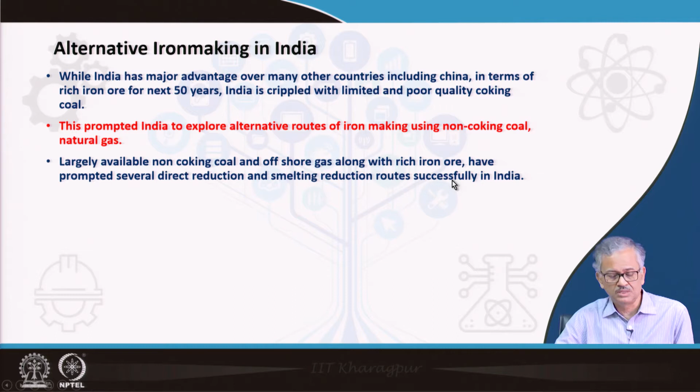This prompted India to explore alternative routes of iron making using non-coking coal and natural gas. We have rather limited natural gas resources, so we have to depend more on non-coking coal. Largely available non-coking coal and offshore gas, along with rich ore, has prompted several direct reduction and smelting reduction routes successfully in India. You can see that several units have come up.

Most importantly, this has helped disperse Indian steel production from eastern India. Initially, all the steel plants were developed in eastern India, because eastern India's Chotanagpur plateau is very rich in iron ore, coking coal, and limestone - everything is there. That's why all the previous SAIL steel plants grew there. Even TISCO, a private party, the Tata Iron and Steel Company, is also in Jharkhand, in the eastern region, because they could easily mine iron ore, coal, and limestone.

But today these plants are slowly dispersing from eastern India, because we are no longer dependent only on that region - we can use natural gas, which is available offshore near the western part of India. So steel plants are also moving, because they are producing DRI using natural gas, and moving away from eastern India, not depending only on rich iron ore which is available in other places too. This is the alternative route - making iron using non-coking coal as well as gas-based processes. It is better for steel plants to be uniformly distributed over India rather than segregated in one place, as happened initially due to proximity of both coking coal and iron ore.

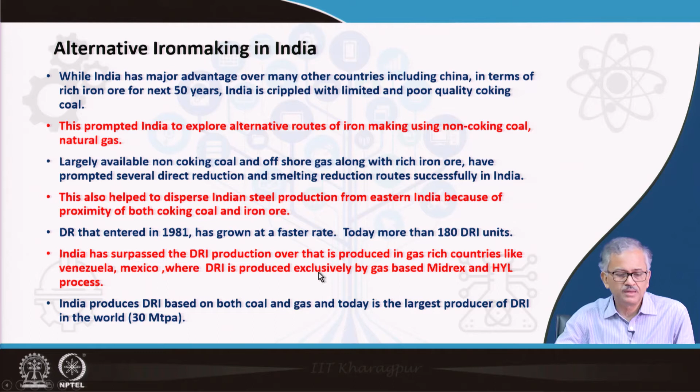JSW also has, in Dolvi, DRI plants that are Midrex based. That DRI plant uses coke oven gas as well as natural gas, mixed together, because natural gas availability is less while coke oven gas contains lots of hydrogen. So the Dolvi plant operates with a 2:1 ratio of coke oven gas to natural gas.

Domestic DRI capacity increased by around 280% in 8 years, from 2005 to 2013, so DRI capacity increased significantly, around 3 times, from 2005 to 13.

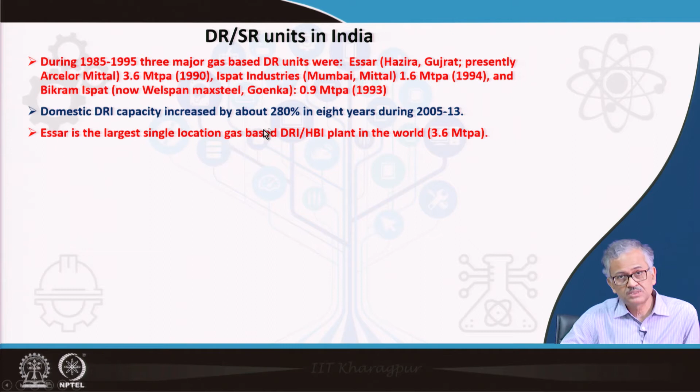Similarly, JSPL is the single largest location of coal-based DRI plant in the world, with 1.32 million ton coal-based DRI and 2 million ton syngas-based DRI. In Raigarh, Raipur, they have a 1.32 million ton coal-based rotary kiln furnace DRI production unit. They also have a 2 million ton DRI unit that is coal-based syngas and Midrex - they retrofitted the Midrex with coal-based syngas at their Angul plant in Odisha, producing around 2 million tons of DRI. Combining these two, JSPL is the largest single location for coal-based DRI in the world.

After 1994, no natural gas-based DRI HBI plant has been set up; the stress is now mostly on coal-based production, because coal is plentiful. Major growth in the coal-based sector occurred from 2003 to 2004 and 2008 to 2009.

Presently there are no small coal-based plants, because coal-based DRI rotary kiln furnaces pollute the atmosphere significantly and don't follow environmental norms. That's why small scale coal-based plants are not allowed by the state government - the pollution control board doesn't allow it. Initially, the Raniganj area in West Bengal saw a lot of these small DRI plants, coal-based rotary kiln furnace plants, mushrooming without looking after the environment, which is not sustainable. Now it's under state government scrutiny, and small scale coal-based plants of 50 tons or 100 tons per day are not allowed.

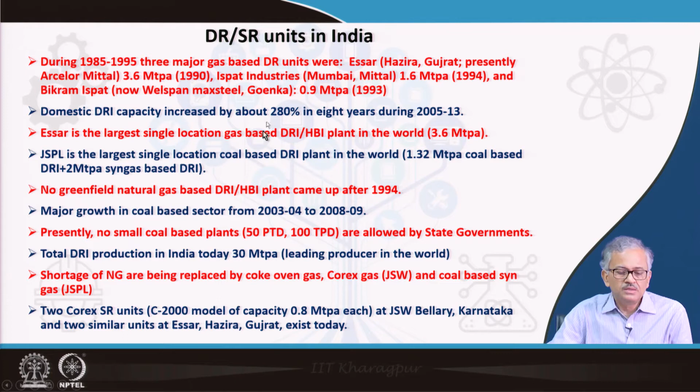So this is the status of DRI plants in India, and India has great potential to develop further in this area. So far in India, technology does not exist that can use iron-bearing waste. There is a bright future for some technology that can utilize this iron-bearing waste material, and RHF can be one very good technology, because in the RHF you can convert it to sponge and then melt it. Another technology may be smelting reduction - there is a Hismelt process type of process which has a very bright future in India.

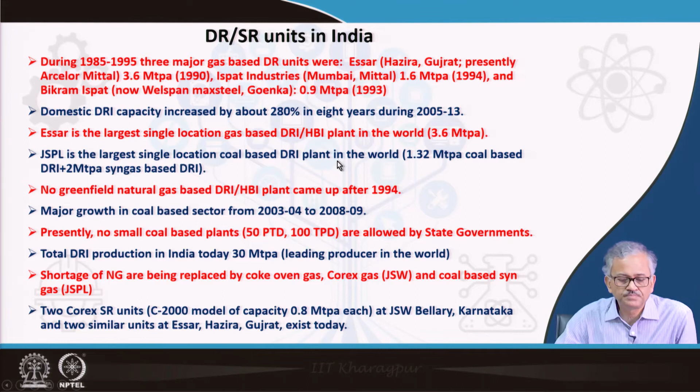Now some comparative data of the Indian iron and steel sector versus global benchmark. If you see productivity-wise, blast furnace productivity measured in tons per day per meter cube, India is 1.5 to 2.5 compared to a global benchmark of 2.5 to 3.5. So Indian production is quite low; we can improve it. Also, sometimes we run under production - whatever the capacity, we cannot produce that much because of lack of demand or other issues involved in the plants. So most of the time our plants run under capacity. That is another major problem, and productivity is quite low compared to the global benchmark.

Energy consumption in gigacalorie per ton of crude steel: India is 6 to 6.5 compared to the global benchmark of 4.5 to 5.5. In terms of gigajoule per ton of crude steel, India is around 28, compared to much less, around 22 gigajoule per ton of hot metal globally. Coke rate in kg per ton of hot metal in India is around 350 to 500 kg of coke per ton of hot metal, and the global benchmark is 300 to 350.

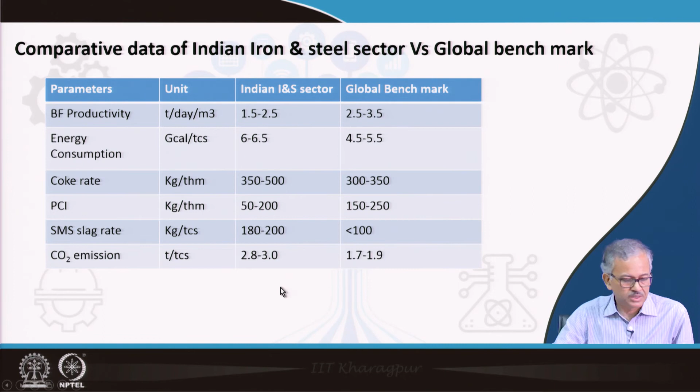Now I will talk about education and research in India, because India needs cutting-edge indigenous and energy-efficient technology. For that, I think research and education in India has to be revamped for day-to-day innovation and futuristic innovation of technologies. But even as we are gearing for 200 million tons of steel in the near future, steel education and research has taken a backseat.

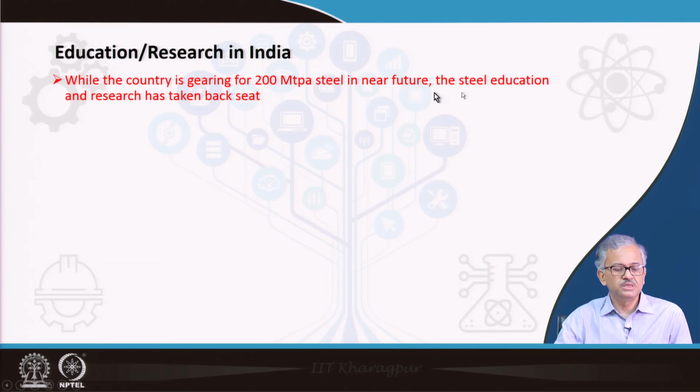This is very unfortunate. There was a decline in the steel market in 1990, and the migration of graduating engineers to the IT sector and management jobs has inflicted irreversible damage, resulting in an acute shortage of qualified engineers in plants and the R&D sector. Most graduating engineers shifted to IT sector and management jobs, not only in metallurgy but in all departments.

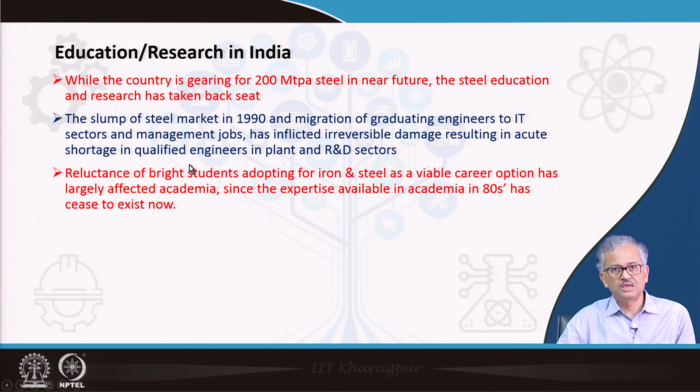Reluctance of bright students adopting iron and steel as a viable career option has largely affected academia. Today we do not have the gamut of academicians that used to exist in the 1980s, because bright students are not adopting iron and steel, both for industry and for academics. Possibly the job is not very lucrative, not a white collar job, money is not much, or development scope is not much. Whatever it may be, there is huge reluctance in adopting an iron and steel career.

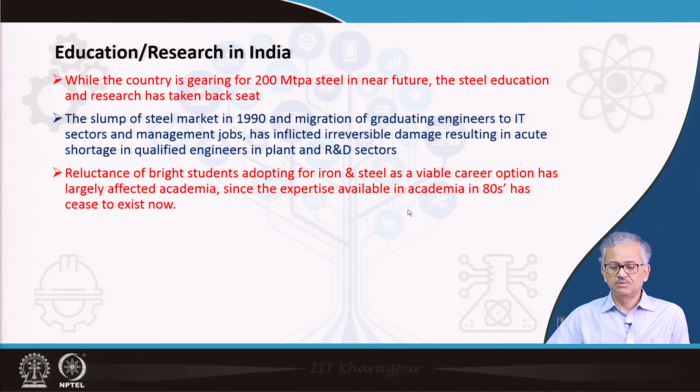As a result, academia is also suffering. Academia is not getting good students for research and education, research and development. As a result, faculty is also shrinking significantly, because no good students means no good faculty in the future. This has significantly decreased and subsequently affected postgraduate teaching and research programs in many departments, and it has formed a vicious circle of lower and lower iron and steel research in India, because no bright students, no faculty, no bright students. As a result, research in the area of iron and steel is shrinking day by day.

Some initiatives have been taken by the Ministry of Steel, like introducing steel chair professors, and also giving some incentives to third year and fourth year students, some scholarships, such that they adopt a career in iron and steel, but it doesn't look to be very effective.

But the country seems to lack critical manpower today, because iron and steel research is very limited in India. We can hand count the people who are doing iron and steel research. When I visited international conferences in Japan and China, you could find so many people working in different areas of iron and steel. I have seen some 50 researchers in coal making, coke making, coke beneficiation. But in India, you can hand count the people doing iron and steel research today. So we are very much lacking.

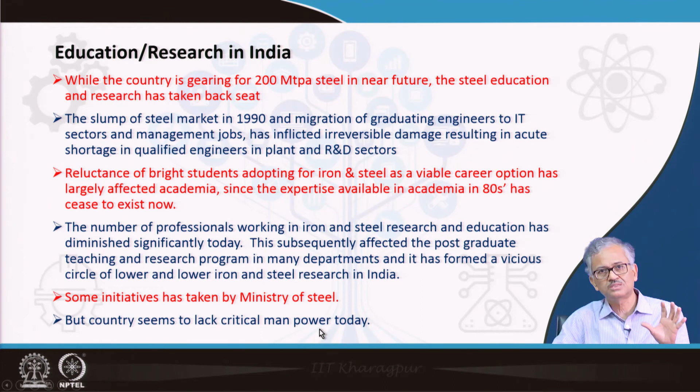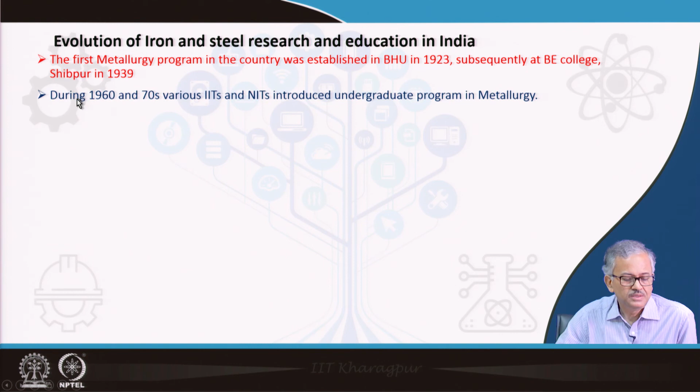If we see how the metallurgy program evolved with time, the first metallurgy program in the country was established at Banaras Hindu University in 1923, and subsequently at BE College, Shibpur in West Bengal, in 1939. During 1960 and 70, various IITs and NITs introduced undergraduate programs in metallurgy. However, between 1970 and 2010, only 6 other colleges added metallurgy. So you can understand there is a declining interest in metallurgy.

The first PhD from BHU was in 1955, and regular PhDs started from 1960 from other departments of other institutes.

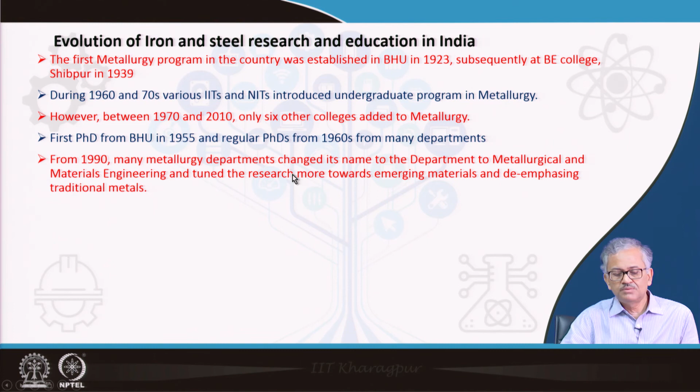From 1990, many metallurgy departments changed their name to Department of Metallurgical and Materials Engineering. The materials attachment has become more, and this tuned research more towards emerging materials, de-emphasizing traditional materials like iron.

Traditional subjects like extractive metallurgy, fuel and mineral engineering are cut short to make places for courses related to materials like electronic materials, nanomaterials, biomaterials, which are given more weightage. As a result, new engineering graduates remain underexposed to metal processing and allied subjects. They remain really underexposed, so how will the interest grow?

Several industrial R&D centers have also been established, but innovative and path-breaking technology is yet to emerge. Where will this technology come from? That requires good manpower, a good research team, combining industry R&D and academia. That should be a good team, not just a couple of people. There should be a large number of people working together, such that we can have some innovative and path-breaking technology.

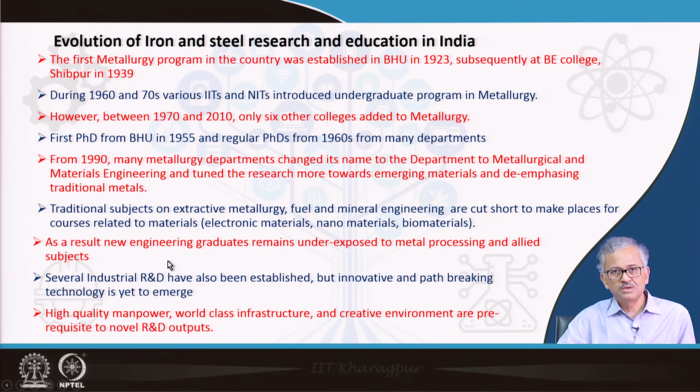So what is required is high quality manpower. That is very much required, and unless students are interested, you cannot do that. So we have to bring back the students to the curriculum, and we have to open up more courses on extractive metallurgy, such that students get exposed and grow interest, leading to high quality manpower development. The steel plants also have a role to play, such that they can make a very good place for bright students to stay there.

So, high quality manpower and world class infrastructure. There is infrastructure we are also lacking, especially in iron and steel research, since the number of faculty and funding is very limited. We do not have world class infrastructure. A creative environment and bright minds are prerequisites for novel R&D outputs.

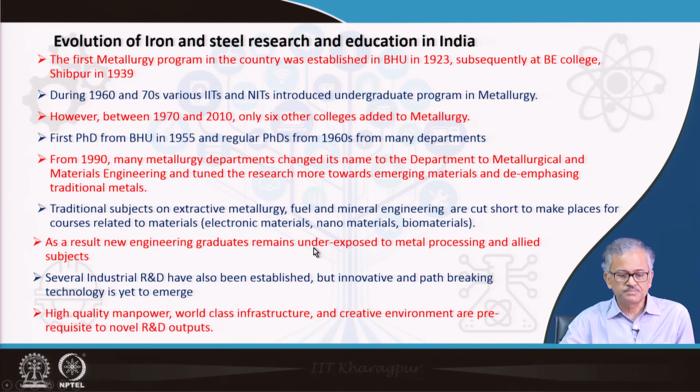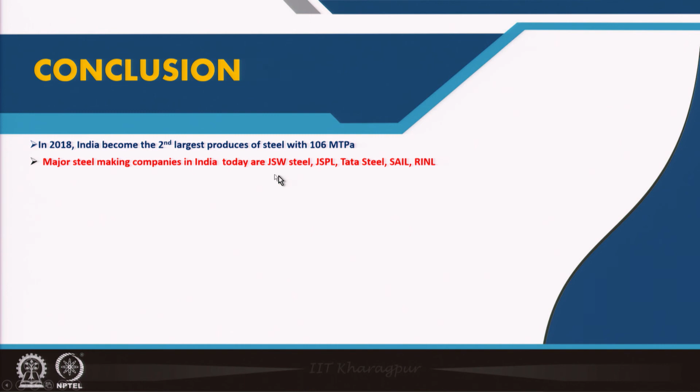So with this, I will come to the conclusion of this section. In 2018, India became the second largest producer of steel with 106 million tons per annum. Major steel making companies in India today are JSW Steel, JSPL, Tata Steel, SAIL and RINL. A large domestic market and availability of rich iron ore for the next 50 years indicate a bright future for India in steel making.

We have bottlenecks also. The bottleneck is coal. We do not have good coking coal, so since we cannot overnight change to other alternative technologies, we have to run with the BF-BOF process to expand iron and steel production, and we have to import coking coal from abroad. But we can increase the number of ports such that we can tap sources from other parts of the world also.

Also, some bottlenecks are there with respect to labor productivity, management and infrastructure, and all this we have to look into and improve. India today has diverted attention towards this.

It is very likely, and a good step, to move towards alternative routes of iron making, also utilizing non-coking coal and whatever gas is available, or based on syngas we have to produce synthetic gas, or you can utilize process gas to produce DRI. Whatever way, we have to go for alternative routes of iron making parallel with the BF-BOF process.

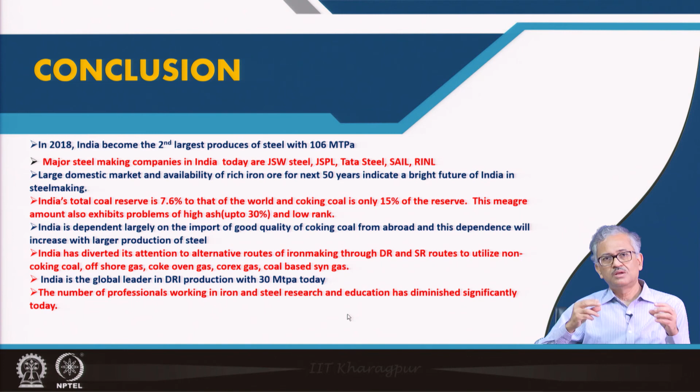So we have to keep this in mind and give more importance to academia. We have to develop world-class infrastructure in iron and steel research, and we have to have bright, innovative manpower, such that in the future we can come up with novel, energy-efficient technology that can produce steel at a much cheaper rate, and very good quality steel at a cheaper rate. Okay, so with these words I will conclude my lecture here.